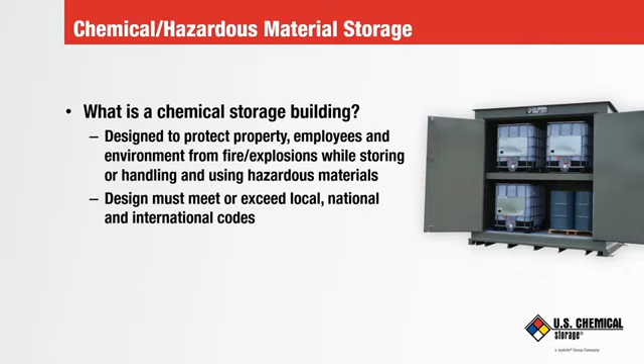The turn was complicated because the building was 72 feet long and 12 feet wide. They had to remove posted signs even to get over the curbs.

As for extreme dimensions, a building's height has caused the most trouble. For example, I know of an incident when an escort car with its steel height-testing pole moved into the left lane of a dual highway while going under a bridge.

But the tractor trailer, with its tall hazmat building, could not find a way through the traffic to follow the escort over into the next lane. The driver felt a bump and just kept going.

A police car saw the sparks fly as the building's roof hit the bridge, and then on down the road the free tie-down chains clattered on the highway. The officer chased down the tractor trailer to inform the driver of what had taken place.

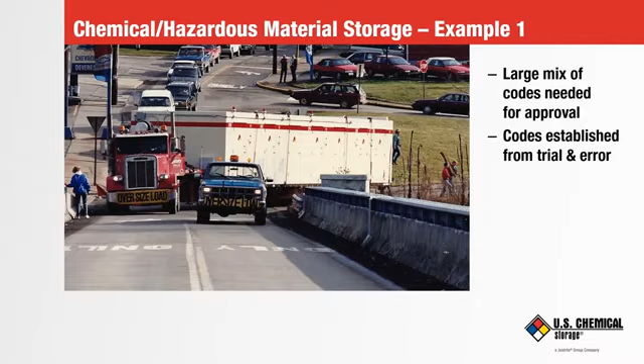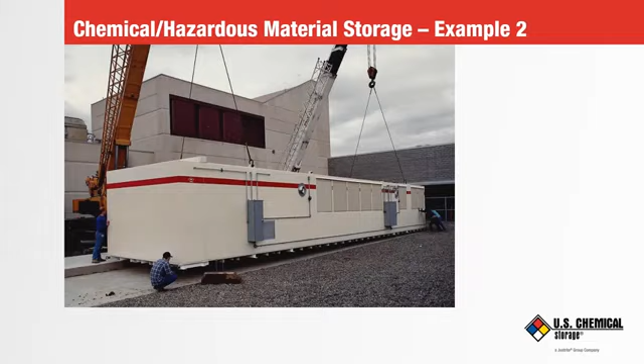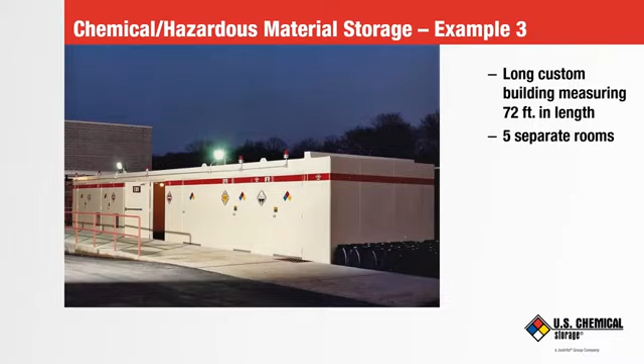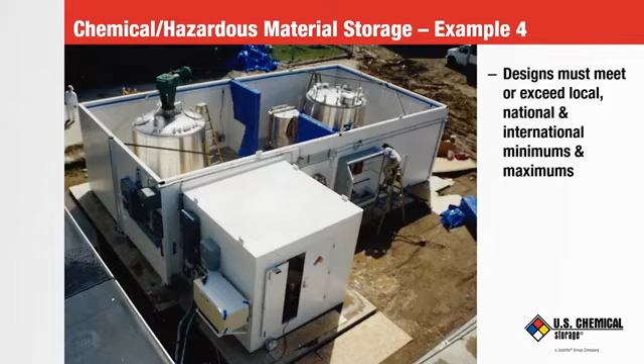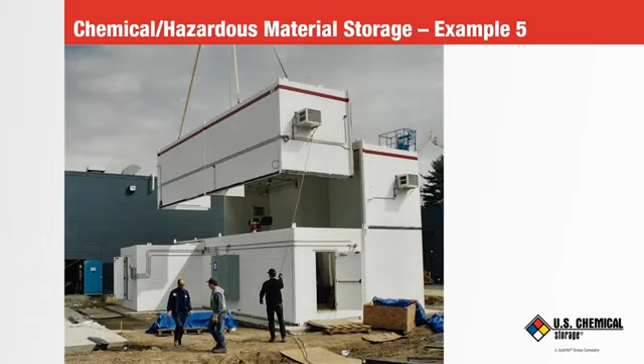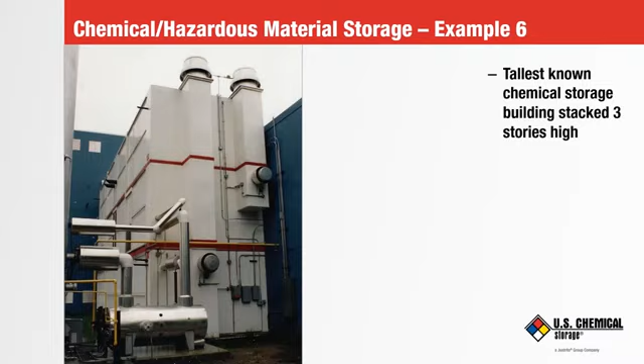Now I'd like to get into 2 unique features having to do with hazardous chemical buildings. These exclusives are spill containment and low-level ventilation systems. We will include fire suppression as a third topic.

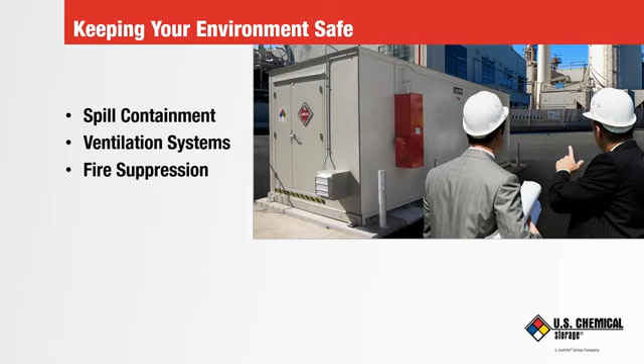Keeping your environment safe via spill containment. A chemical storage building's most unique feature is that it must have a liquid-tight sump built into the floor. Sumps are constructed of either continuously poured concrete curb integral to the concrete floor, or a continuous welded 10-gauge steel plate for sump walls and floor.

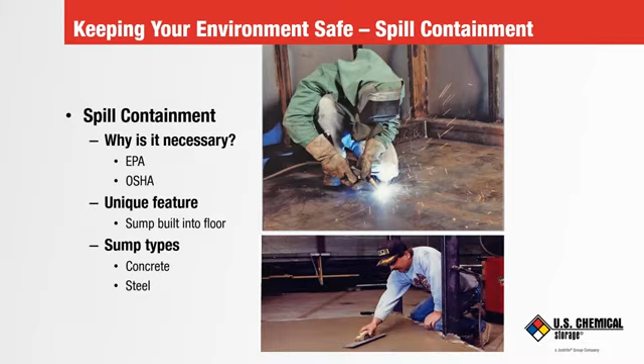The idea is to catch spills and keep them from getting into the soil under and or around the building. Just how much containment is required, or how high do the sump walls have to be?

OSHA Code paragraph 1926.152 requires a 4-inch sump depth or height when a fire sprinkler system is installed. Now this is silly because not all hazmat buildings are required to have sprinkler systems, such as for non-combustible chemical liquids.

The EPA Code paragraph number 40 CFR 264.175 requires a sump capacity to be 10% of the total of all the containers stored in the building, with or without sprinkler systems. A more practical answer:

Common sense and being practical is also required. If the containers are sitting down on the sump floor, then the amount of sump capacity or its wall height must be increased by the displacement factor of the total number of the stored containers. If the containers are placed on an elevated floor, then any of the support structure involved in the elevated floor's construction is also to be considered for its displacement factor.

In the late 1980s, Factory Mutual, known as FM, was brought into the picture because hazmat building manufacturers wanted a qualified third party to review building designs. This qualified their proposals to prospective clients that their building met certain safety codes, especially the National Fire Protection Association NFPA 30, which is called the Flammable Combustible Liquids Code.

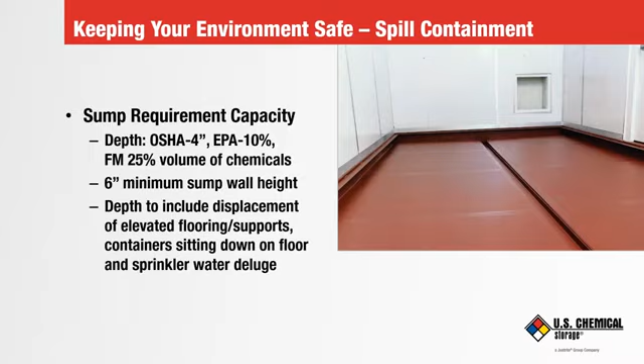Other factors must be considered that determine sump floor height. If there is a water-based fire suppression system, the capacity of the sump height must add in the total amount of dispensed water in a 20 or 30-minute deluge. This is dependent on local codes and/or opinions of the local authorities having jurisdiction.

This is because the spilled chemical usually will not mix with water but will float on the surface of the rising sprinkler water. This cannot be allowed to pour over the door sills, out of the building, and into the environment. The calculated water catch will result in sump heights usually greater than 20 inches.

The sump floor may be sloped. If the slope is 2 inches from the high to the low spot, the total sump height needs another inch. Sloping the sump floor allows for easy drainage during sump cleaning. There may be a lot of dirt tracked into the building over time that needs to be cleaned periodically.

A spill is required to be cleaned up immediately. The slope should flow to a slope trench for faster drainage and places the buildup under the aisle of the elevated floor, which is usually made of grating.

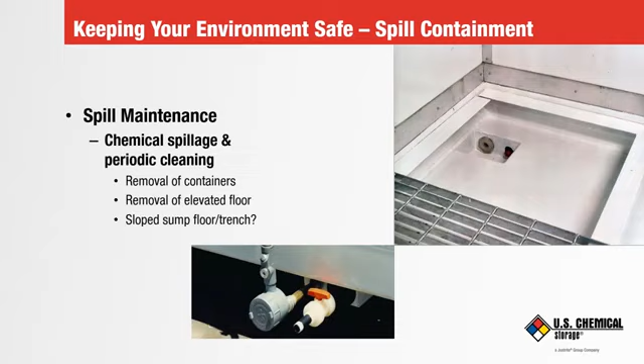If the chemical on the surface of the water catches fire, it will not be cooking the bottoms of the remaining containers on either side of the aisle. The fire will be exposed directly to the fire suppression system that would be on the ceiling.

Keeping your environment safe, this time we're talking about ventilation systems. The second most unique feature of a chemical building is its ventilation system. It is upside down as compared to familiar systems designed to remove hot air buildup at ceilings and from attics.

During a spill, flammable combustible liquids will flow down through the elevated floor to the bottom of a flat sump floor, spreading evenly all over the building. This provides the greatest surface area for evaporation, which will create the fume. Immediately after a spill, the liquid is exposed to the air.

That's even before the liquid even hits the floor. It evaporates and becomes a fume or vapor. This fume is usually heavier than air and will drift down, adding to the total fume accumulation across that flat sump floor. The fumes will begin to rise upward past the elevated flooring.

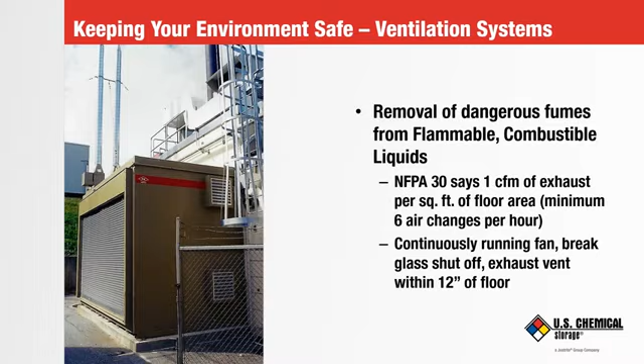If the fume-air mixture reaches a particular percentage, depending on the chemical, it is susceptible to ignition by flame or spark. If ignited, an explosion in the building will occur.

Ventilation is a solution. NFPA 30, Flammable Combustible Liquids Code, paragraph A-4-6, says simply, quote, Ventilation requirements include mechanical ventilation where dispensing operations are expected, unquote. We'll talk more about the different types of ventilation systems on the very next slide.

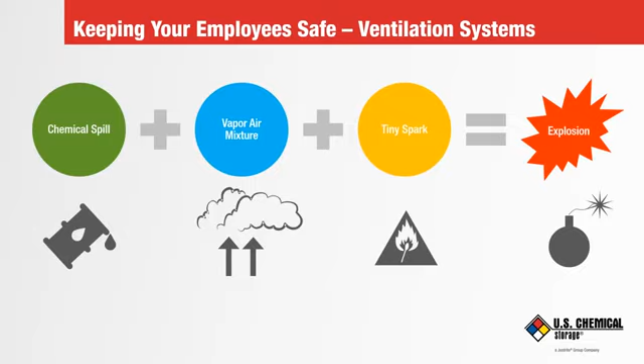There are three types of ventilation systems. There's gravity ventilation. A single opening in the lower wall of the building is fitted with a rain louver and a bird screen. Now, if it's a fire-rated building, they add a fusible link drop-down shutter.

Now, this acts as a vent. The top of the rising fumes will be pulled out of the opening by gravity, like a hole in a coffee cup, allowing the fume to drift down on the ground where it eventually dissipates into the atmosphere.

If there was another vent, like the first one, on the opposite wall, the wind outside the building can push fresh air in and/or pull out the fumes outside. This is the least expensive and least dependable method.

Then comes natural ventilation. Now this starts with the same single low-level vent just described, but the second vent is placed high up on the opposite wall near the ceiling. This expels hot air near the ceiling, but near the floor, under the upper vent wall, for more than half of the building, the fumes remain. This is a cheap solution and does not do a good job of expelling heavier-than-air fumes.

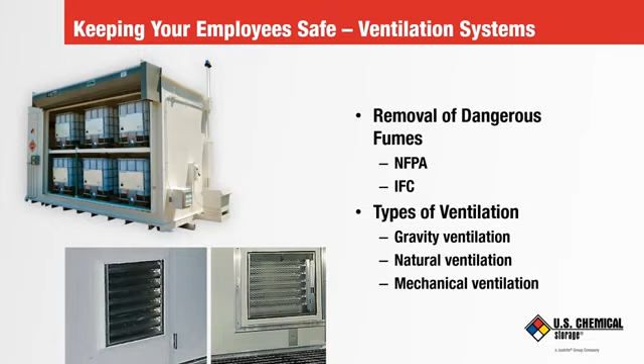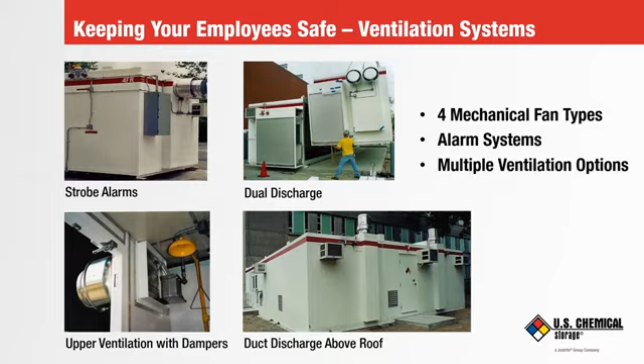Keeping your facility safe, now we're going to talk about fire suppression, which is our next topic.

Two of the most common fire suppression systems are water sprinkler and dry chemical. First, we'll talk water sprinkler. This type of fire suppression system was first used at the turn of the 19th century in the United Kingdom. The first automated system was installed in a factory in Connecticut in 1874.

Water sprinkler systems are favored by almost all fire marshals. Basically, iron piping is installed on the ceiling of a chemical storage building where sprinkler heads are attached on the piping at predetermined spacing based on the known water pressure supplied by the local water company.

Each sprinkler head has a fusible link with a set temperature setting and will automatically, individually, one head at a time, dispense the spray of water in a predetermined pattern. In a wet type, the pipes are full of pressured water.

In northern and southern hemisphere freeze zones, care must be taken so the incoming water supply is buried deep below the local ground's frost line and insulated or wrapped in electric heat tape to prevent water from freezing. The wet sprinkler system requires the interior of the building to be heated in the winter.

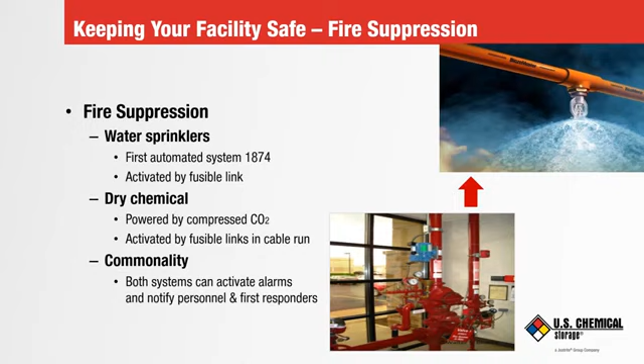Or there's a dry type, water sprinklers that have no water in the piping prior to discharge, just air. When a fusible link releases, the air comes out first, and then the water will be released from a heated nearby facility into the sprinkler piping. You can see that in the lower right-hand photo that was up.

Now there's dry chemical systems. A dry chemical fire suppression system, instead of a water-based system, has fire extinguishing powdered chemicals with added particulate material to provide resistance to packing, moisture absorption, and caking in the piping to achieve a proper flow. It extinguishes the fire by smothering and interfering with the combustion process.

The powder mix is contained in a storage tank. This dry chemical, when released, is propelled by compressed CO2. The heads do not come with fusible links, as in the water sprinkler system.

Within inches and parallel to the piping, a cable is strung on the ceiling from far within the building, running all the way back to the controls. On the cable, fusible links are distributed at predetermined distances, so that when the temperature from a fire reaches the melting point of any single fusible link, the cable is cut. This releases the valve of the compressed CO2, pushing the dry chemical powder into the piping and out of all dispensing heads at the same time.

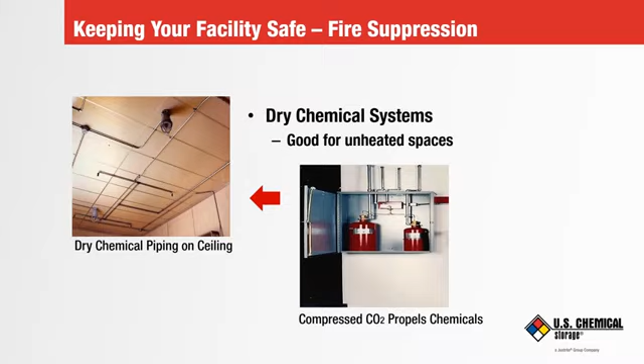Fire suppression systems are involved in determining the amount of hourly fire rating of the construction of the walls and ceilings as to how close hazmat buildings are to other buildings, roads, and property lines.

Codes written by NFPA, OSHA, and the International Fire Code all have very similar but not exactly alike standards on setback distances. For example, most codes require the building to be 4-hour fire rated when within about 10 feet of another building. But adding a sprinkler fire suppression system will reduce the fire rating to 2 hours.

At the other extreme, a hazmat building more than 30 feet from buildings, roads, and property lines does not have to be fire rated or protected by a fire suppression system.

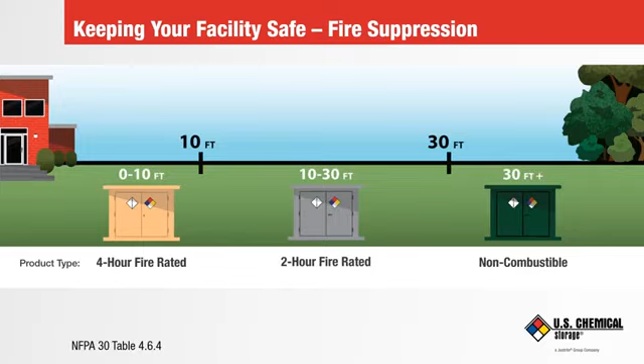So there you have had a brief description of hazardous chemical buildings. We have defined what a chemical storage building is and what makes it unique from other buildings. We have touched on what's expected for chemical spill containment, types of ventilation systems and their operation, plus two of the most used fire suppression systems. We've also discussed some of the codes needed to meet or exceed proper chemical storage.

Other future topics for discussion are what building strength is expected if defending against explosions and how to determine the amount of explosion relief. Also, the design of explosion-proof interior and outdoor lighting, heating, and cooling components. They all have to be Class 1, Division 1, Group C and D explosion-proof.

Another area of interest are the extreme locations where these buildings can be placed, from the desert to the Arctic. For example, I know of a hazmat building that was designed for extreme cold, and had to be built in two modules to fit into a military C-130 aircraft to be flown to the island of Attu at the far end of the Alaskan Aleutian Island chain.

That's it. I hope this webinar has helped with some of the general education and would welcome any questions. Thank you for your time. Jamie, I'll turn it over to you.